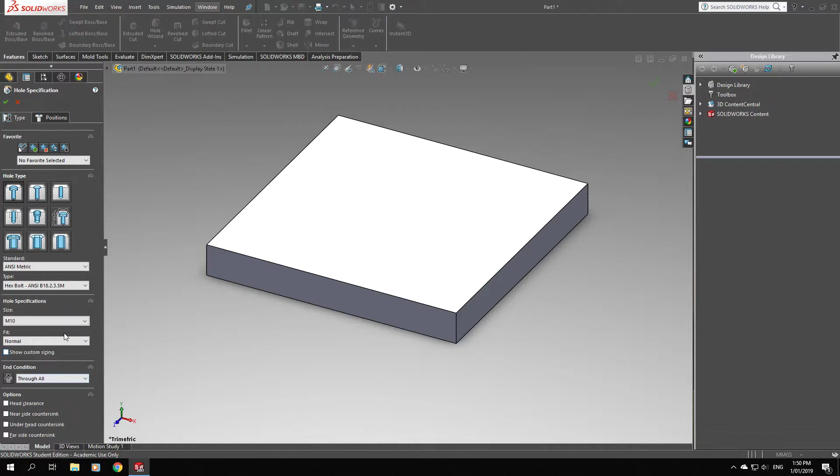Okay, and now we just click position. So just left click and then it should highlight. Let's just do it in the center and click the tick. So now we got a counter bore that's M10 size and it's gone all the way through.

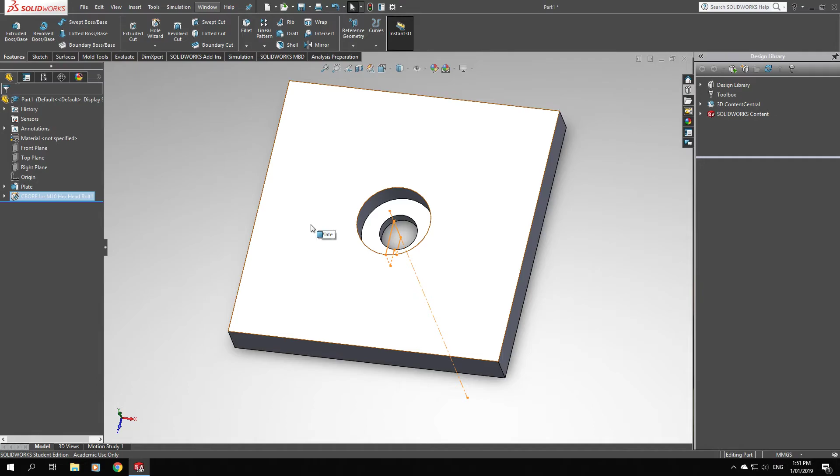Your bolt head will sit in this counter bore and then your bolt will go through. So that's what Hole Wizard's used for. It's mainly for specific components with bolts and screws.

So another example would be countersunk. This might be for your screws.

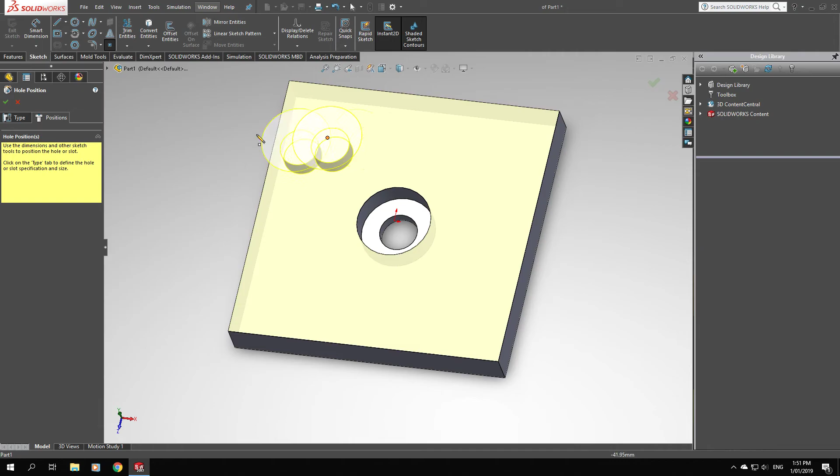Settings, same settings. So again, just click anywhere. Ideally, you would have your position sketched out, and then you can just put your holes into those points.

So that's what a countersunk hole looks like. And yep, that's it.